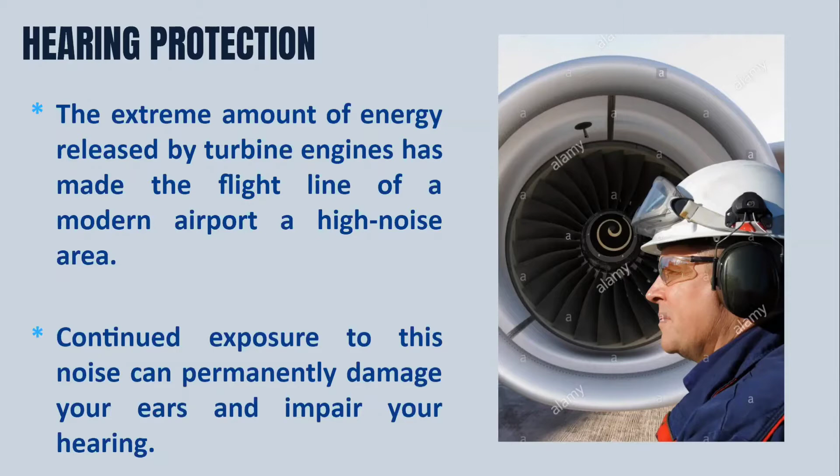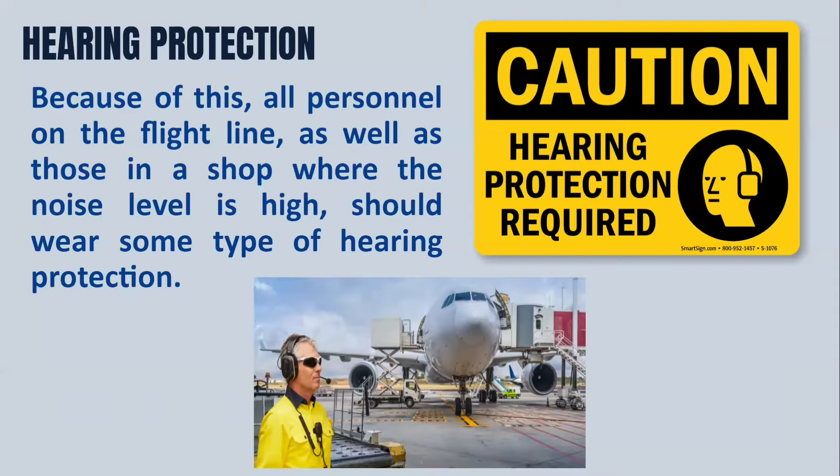Because of this, all personnel on the flight line, as well as those in the shop where the noise level is high, should wear some type of hearing protection. All personnel or maintenance technicians on the flight line must always be mindful of what is going on around them. It is recommended that workers shall be required to wear hearing protectors when engaged in work that exposes them to noise that equals or exceeds 85 decibels as an 8-hour time-weighted average, or the average exposure to noise.

This can be either external protectors similar to a pair of large earphones or internal protectors that fit into the auditory canal of the ear. Either type prevents sound energy from damaging the inner ear mechanism. The example of hearing protection is the image on the right side. Both types, external and internal protectors, reduce the sound level reaching the eardrum and reduce the chances of hearing loss. Hearing protection is really essential because working on a flight line with high frequency, even short-term exposure to these sounds can cause hearing loss. Continued exposure may result in hearing damage.

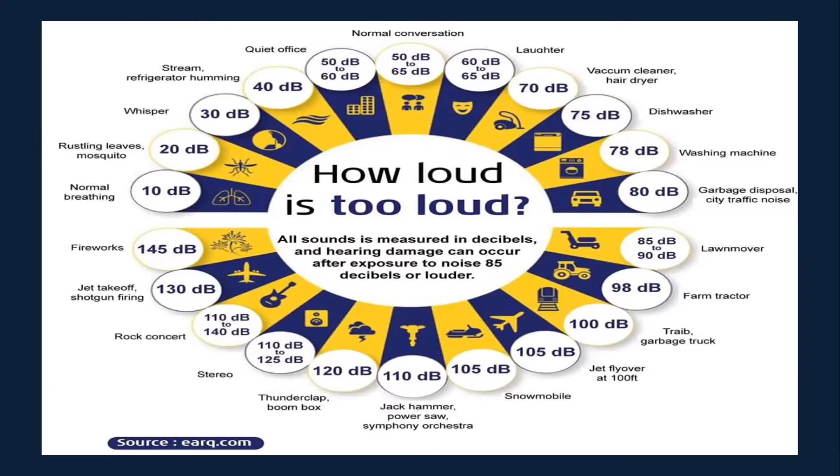The decibel is a logarithmic unit used to measure sound level. It is also widely used in electronic signals and communication. The dB is a logarithmic way of describing a ratio, as you can see in the picture. Next.

Foreign object damage, or FOD: if foreign objects such as nuts, bolts, and safety wires are drawn into an inlet of a turbine engine or through an arc of a rotating propeller blade, they can easily cause damage that can lead to a catastrophic failure.

FOD is any object found in an inappropriate location that, as a result of being in that location, can damage equipment or injure personnel. FOD includes a wide range of material including loose hardware, pavement fragments, catering supplies, building materials, rocks, sand, pieces of luggage, and even wildlife. FOD is found at terminal gates, cargo aprons, taxiways, runways, and run-up pads.

The three main areas that require specific attention are: first, runway FOD. This relates to various objects which have fallen from aircraft or vehicles, broken ground equipment, birds, etc. that are present on a runway and may adversely affect fast-moving aircraft during takeoff and landing. Runway FOD has the greatest potential of causing damage.

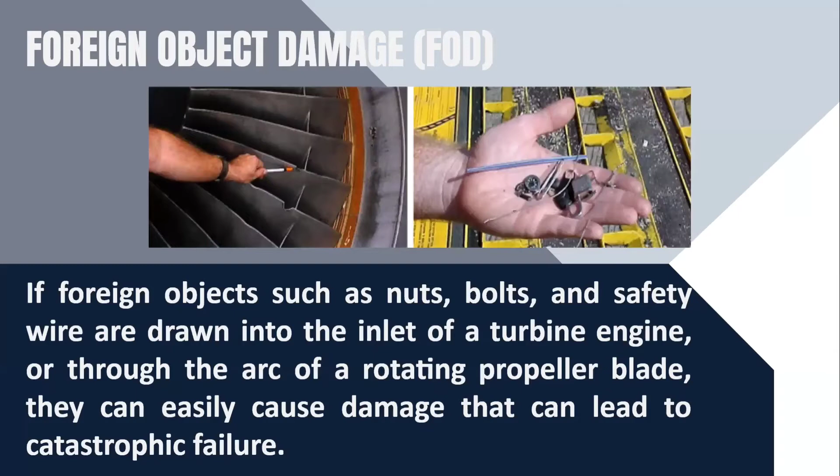The most notable effects of FOD are damaging aircraft engines if ingested, cutting aircraft tires, lodging in aircraft mechanisms preventing them from operating properly, and injuring people after being propelled by a jet blast or propulsion. The damage is estimated to cost the aerospace industry $4 billion a year. Next slide.

The contributory factors that can affect the presence and handling of FOD are poor maintenance of buildings, equipment and aircraft, inadequate staff training, pressure on staff not to delay movements for inspection, weather, and presence of uncontrolled vehicles on the airfield.

Defenses against FOD include the following activities. Regular and frequent inspection of the airfield, including aircraft maneuvering areas and adjacent open spaces; suspension of runway operations upon notification to ATC about FOD on or near the runway until the FOD has been removed and the runway inspected as necessary; regular and frequent inspection of the airfield buildings and equipment, and immediate repair or withdrawal from service of items likely to create FOD.

Next is the inspection of the parking gate to ensure that it is free of FOD, including ground equipment, and of ice, snow, and other material capable of reducing braking action. It is normally the responsibility of the airline representatives. Next is the removal of FOD as soon as it is identified. Next is use of constant inspection systems, and lastly, implementing a FOD control program. Next slide.

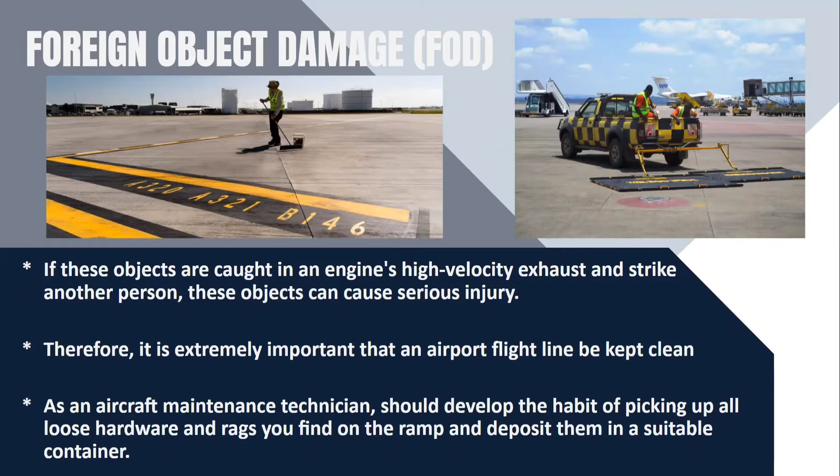FOD prevention and clearance is the responsibility of all airport users. However, specific responsibility must be allocated to appropriate persons who must be suitably trained and supervised. Quality assurance is an essential tool to ensure that responsible organizations and personnel carry out their allotted tasks correctly.

While the airport authority is responsible for the runway, taxiways, and general maneuvering areas, airline representatives or handling agents are normally responsible for ensuring that the gate and its approaches are clear of FOD, including the ground equipment, and are free of ice, snow, and other contaminants capable of affecting braking action. Handling contracts must specify the extent of agents' responsibilities, and agents' procedures must specify how these responsibilities are to be exercised. Next.

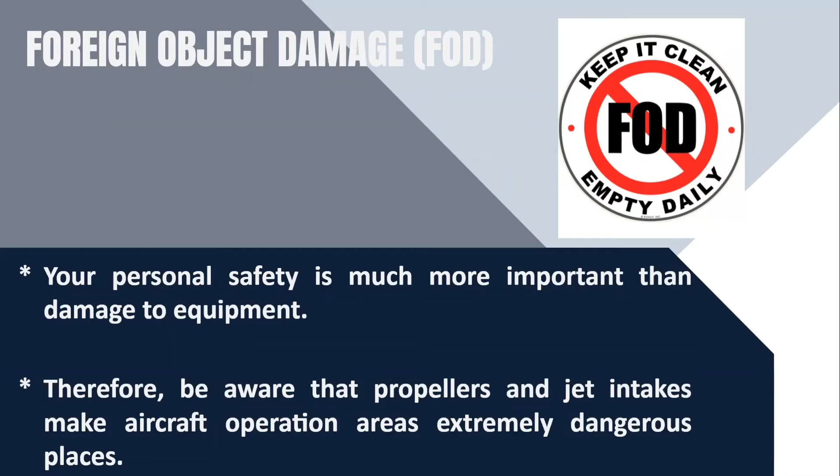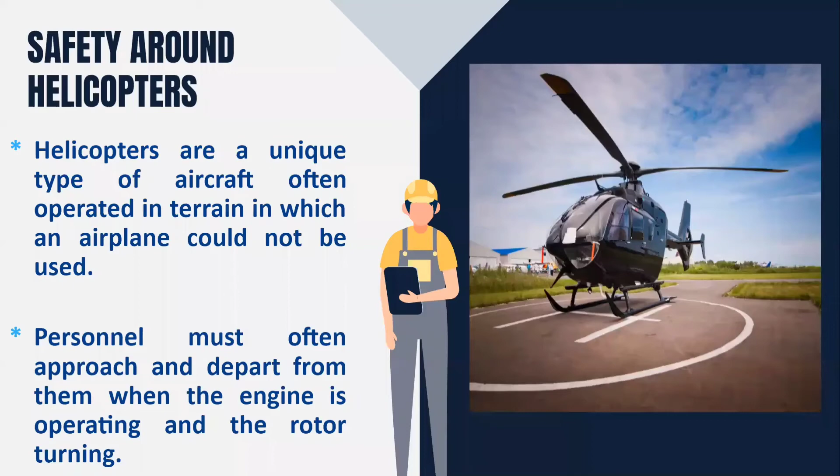Safety around helicopters. Helicopters are a unique type of aircraft often operated in terrain in which an airplane could not be used. Personnel must often approach and depart from them when the engine is operating and the rotor is turning. The procedures and safety will be discussed by the next reporter.

Safety around helicopters. We have to understand that the passengers' familiarity and knowledge on how helicopters work depend on how we brief them, guide them, and have them understand the danger it carries. One thing to keep in mind when working around helicopters is that many of the passengers carried on helicopters are not familiar with this type of aircraft. Therefore, it is your responsibility to watch that they do not endanger either themselves or the helicopter.

This means that when passengers are boarding the helicopter, the pilot or the other crew members should advise passengers to stay away from the rear of the helicopter and crouch low before getting to and going under the main rotor. Next, please.

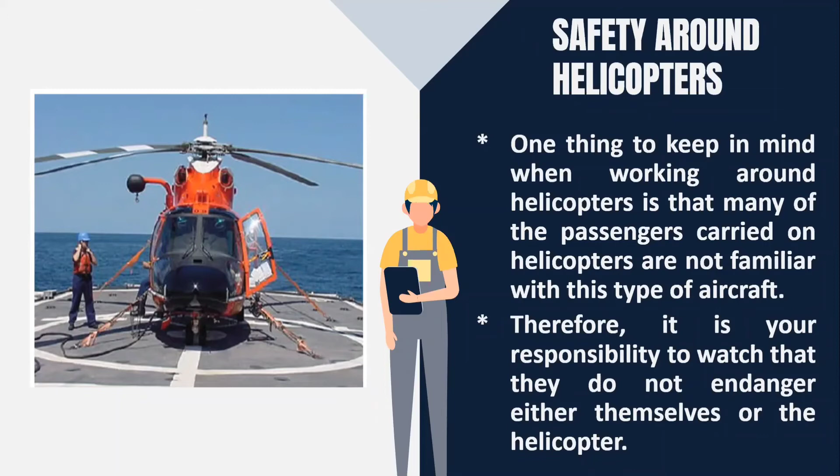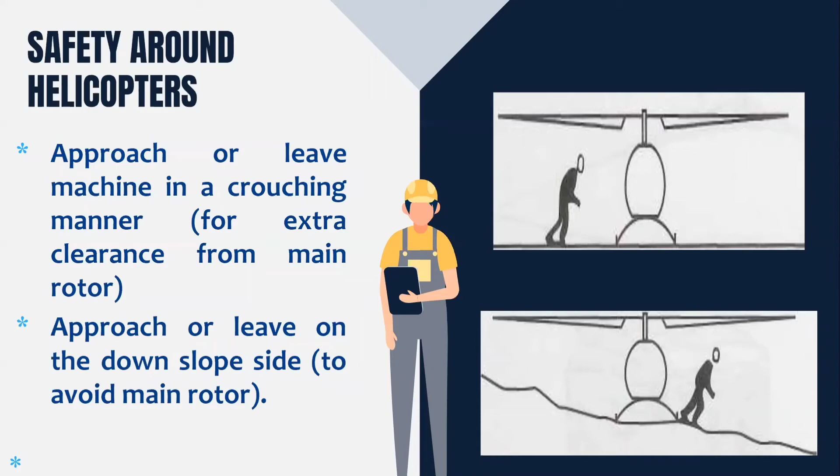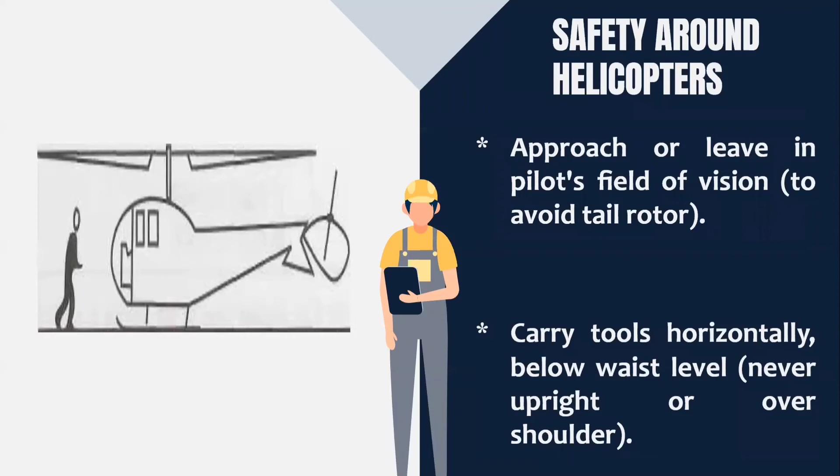Carry tools horizontally below waist level, never upright or over shoulder. Carrying tools are needed to be below waist level following horizontal position, which prevents them from flying off from your belt to the rotor mast and damaging the aircraft.

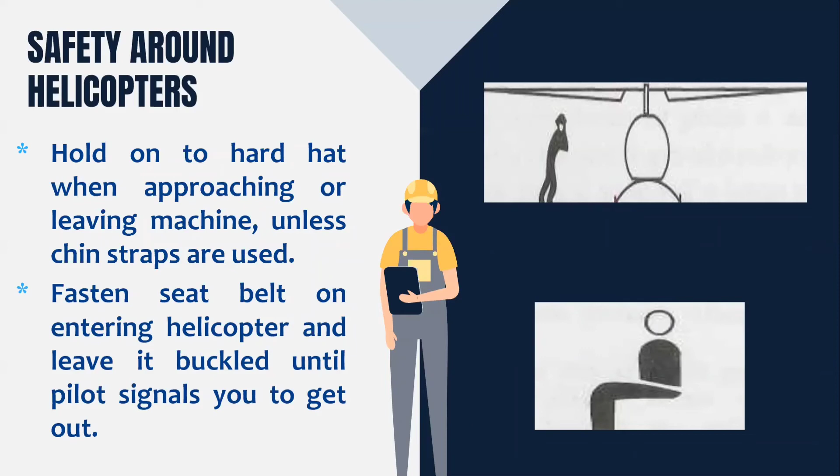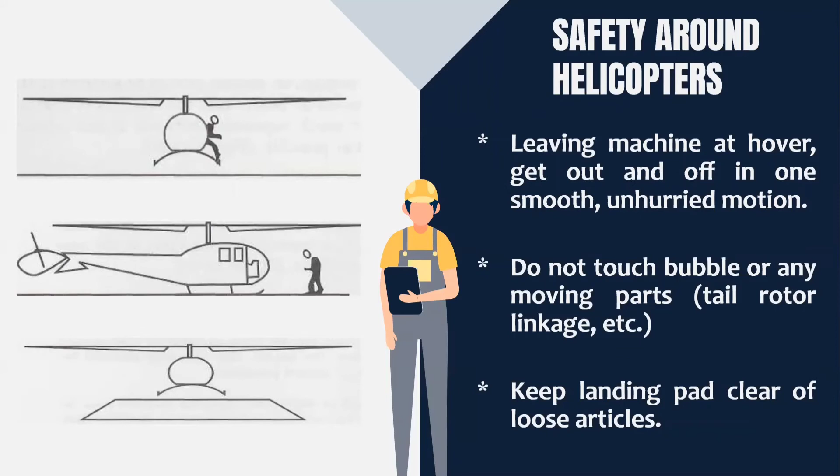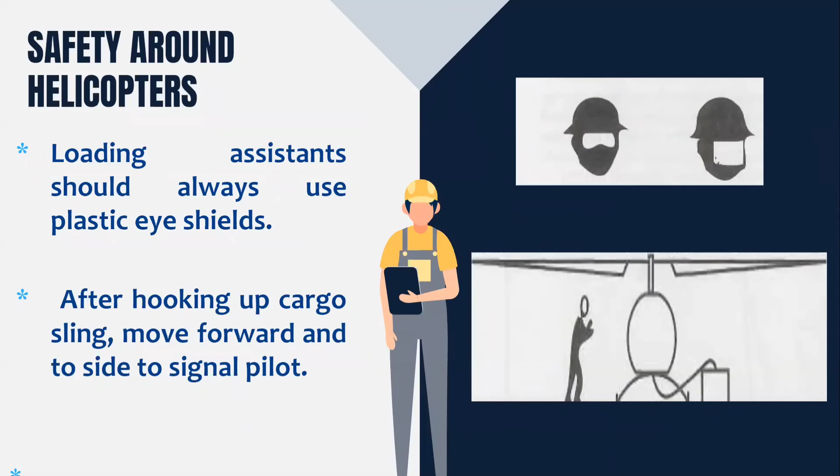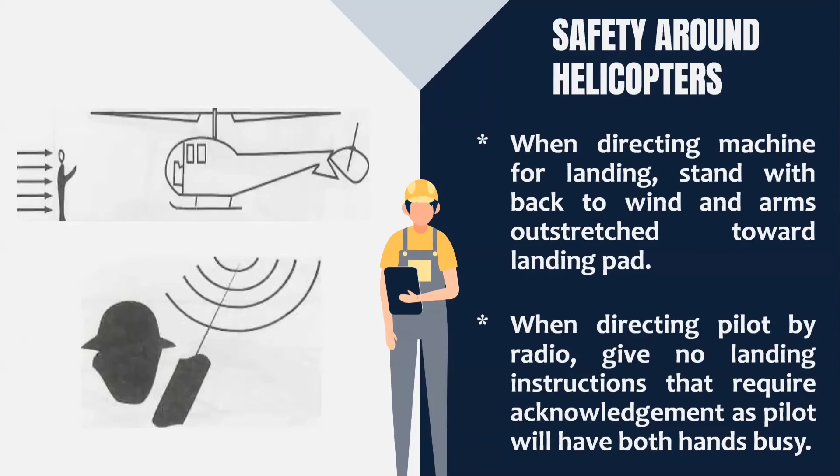When directing machine for landing, stand with back to wind and arms outstretched toward landing pad. When directing pilot by the radio, give no landing instructions that require acknowledgement, as pilot will have both hands busy. When directing the pilot by radio, remember they may be too busy to give a reply.

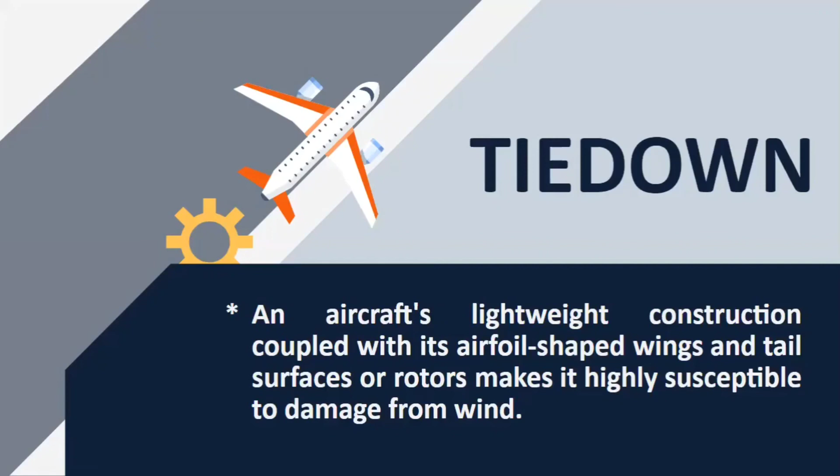An aircraft's lightweight construction, coupled with its airfoil-shaped wings and tail surfaces or rotors, makes it highly susceptible to damage from wind. So, all aircraft are made from light materials for them to be able to fly.

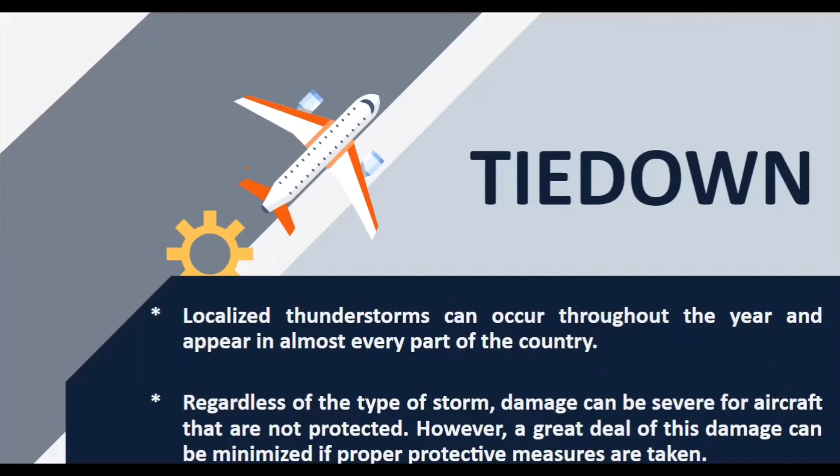The best protective measure you can take to help ensure an aircraft's safety is to put it in a hangar. However, at times a hangar may not be available. If this is the case, an aircraft should be securely tied down and its controls firmly locked in place.